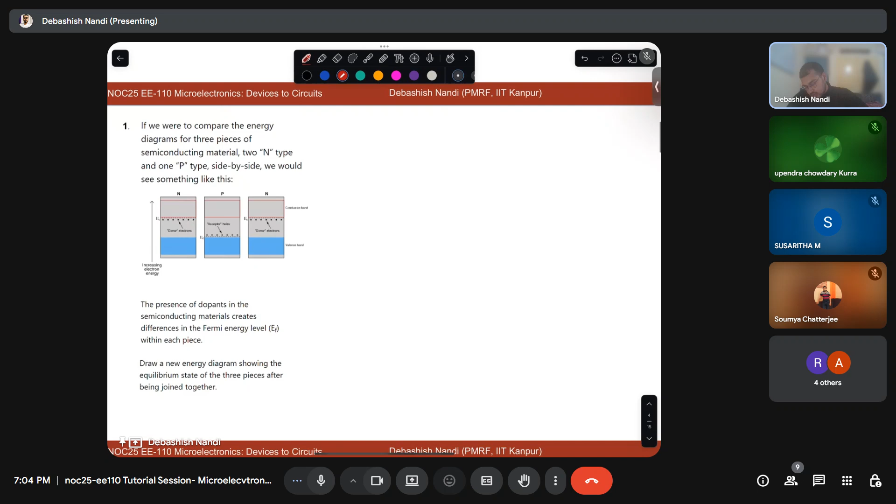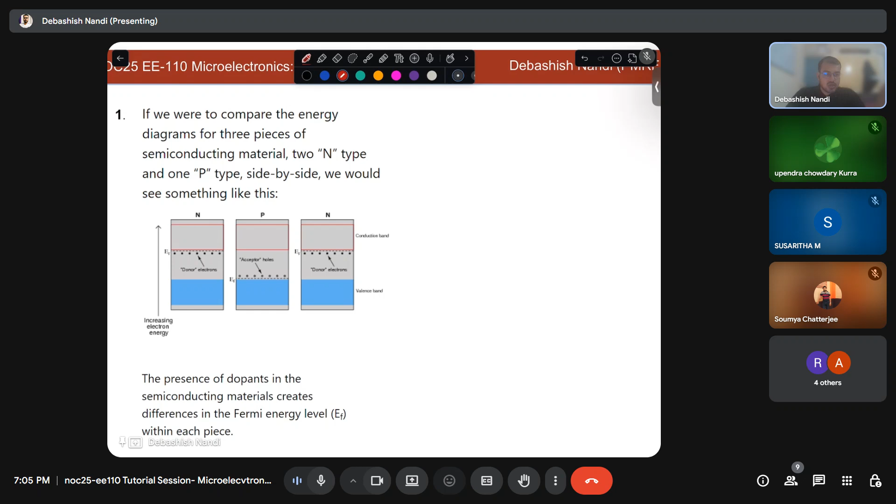So the question is that if we were to compare energy diagrams of three pieces of semiconducting materials, two are doped as N type and the middle one is doped as P type, how do you draw the band diagram? So how many of you are comfortable with the band diagram and how many of you cannot at all draw the band diagram or do not understand? Maybe you can respond in the chat. So are you all comfortable with the band diagram? I am talking about energy band diagrams.

Yes, sir, band diagram. Anything you say about band diagram will be good for me. There is some electrical noise coming from your microphone. Yeah, please go ahead. Hello, sir. Am I audible? You are audible. Please go ahead. Okay. Anyway, maybe some technical issue.

So anyway, I'll just handhold you for this part. I understand that most of you are from an undergraduate background, so there is a correct way to draw the band diagrams, right? So I'll be just going over that. What we are going to discuss is how to correctly draw the energy band diagrams. Okay, so a couple of pointers: the energy band diagram is a two-dimensional plot. Okay, it is a 2D plot.

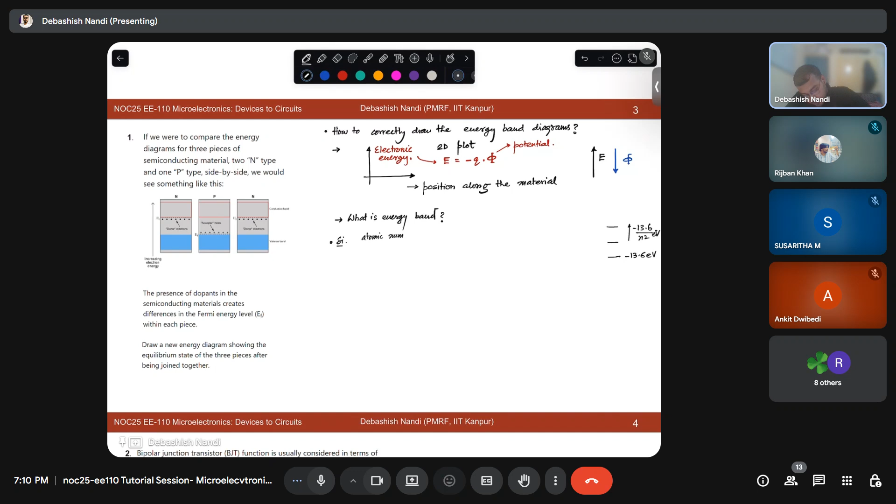You know, for hydrogen atoms you have discrete energy levels, right? Discrete energy levels starting with minus 13.6 electron volts, and it moves as minus 13.6 by n squared eV, right? n is your principal quantum number. Now for silicon, how many electrons does silicon have? What is the atomic number of silicon? Atomic number is 14, right?

1s2, 2s2, 2p6, then 3s2, 3p2, right? Is that okay? So now how many electrons do we have in our valence band? We have 4. That is the third orbital, right? So now if I consider a single silicon atom, I will have these discrete energy levels. Let's say this is your 1s, this is your 2s, very closely there will be 2p, then you will have 3s, and there you will have 3p, right?

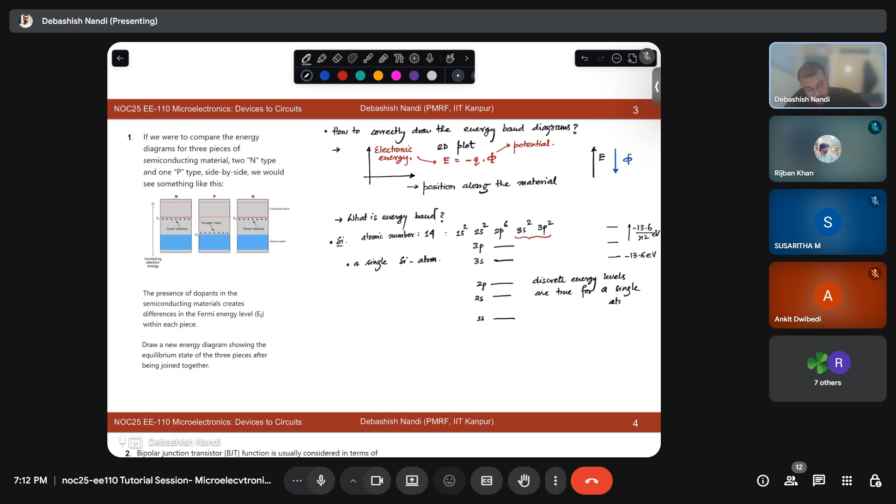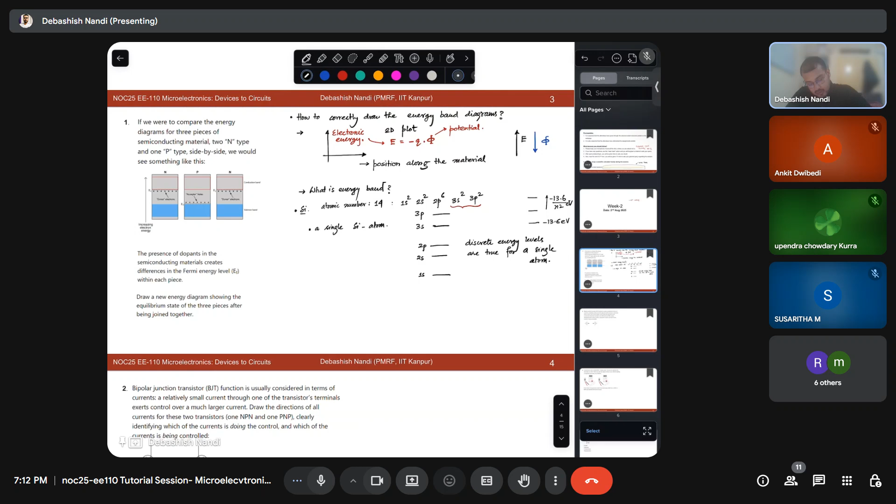Okay, so these discrete energy levels are true for a single atom, but when you move into a semiconductor material or a slab of semiconductor, there will be more than one atom for obvious reasons, right? Then what happens? Let's say these are two silicon atoms, and these two are apart by a distance, let's call it x. So if x is infinity, then we have discrete energy levels. Fine. Now what happens when we start to reduce x?

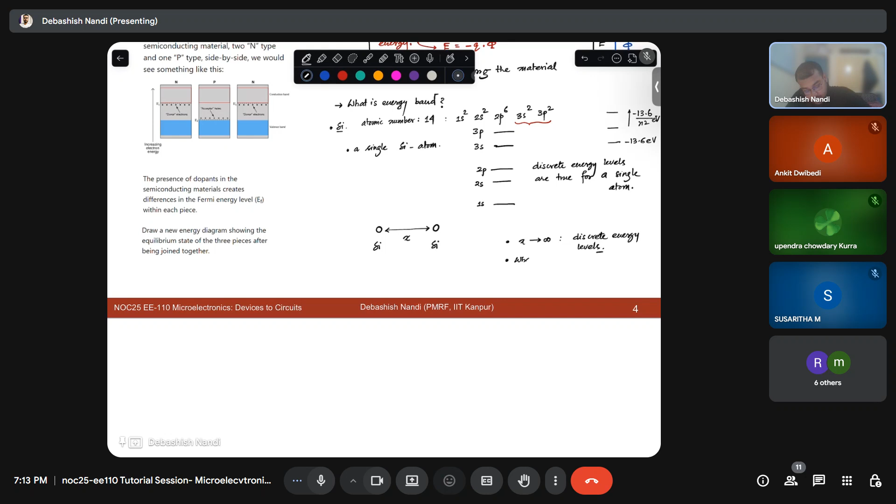If x is reduced, then you see this entire thing, so what I am doing, earlier it is very far, okay, now I am trying to bring this closer to the other atom. So what is happening? Will the lines superimpose exactly on top of each other, or will there be some gap? Can you comment, anyone? There will be a gap. There will be a little gap, right? And why is that so? Because

your Pauli's exclusion principle states that in a system no two electrons should have the same quantum numbers, right? That means no two electrons should have exactly the same energy. So they will try to cope with the same energy, but there will be a little gap. Now imagine how many atoms are there in 1 centimeter cube of silicon. Last time I told you, right? It is 5 times 10 raised to 22 per centimeter cube.

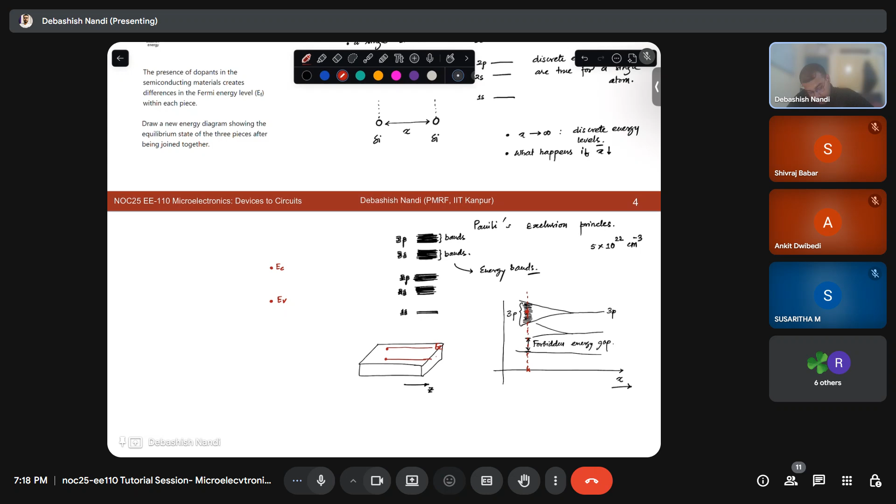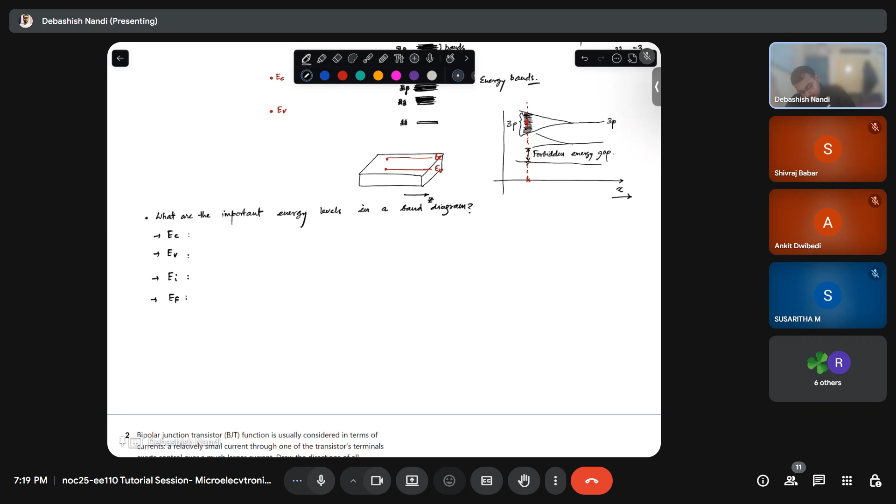If that is fine, then next point is, what are the important energy levels in a band diagram? So you know about EC, you know about EV. What is EC, what is EV? You know about EI, you know about EF, and there is something called E0. Once you understand what I am teaching you right now, you will be able to draw energy band diagrams for any material, believe me. This is the very fundamental stuff, okay?

So please tell me, what are these things? What is EC? Conduction band energy level. No, it is not conduction band energy level. You should be more specific. The bottommost part of the conduction band. Exactly. This is the bottom edge of the conduction band, okay? So why are we concerned about the bottommost point? Let's say this is my conduction band. Why am I concerned about only this edge? Can anyone tell me why this is EC and this part we generally do not concern about? Anyone?

The reason being that an electron, or for that matter any object in this universe, tries to attain the lowest energy level, okay? Even if you have an electron at this point that gains some energy, it will lose it and fall back to the conduction band edge via a mechanism called scattering. By scattering, the energy is lost or transferred in terms of heat, or lattice vibrations. So that is why we are concerned about the conduction band edge only, okay?

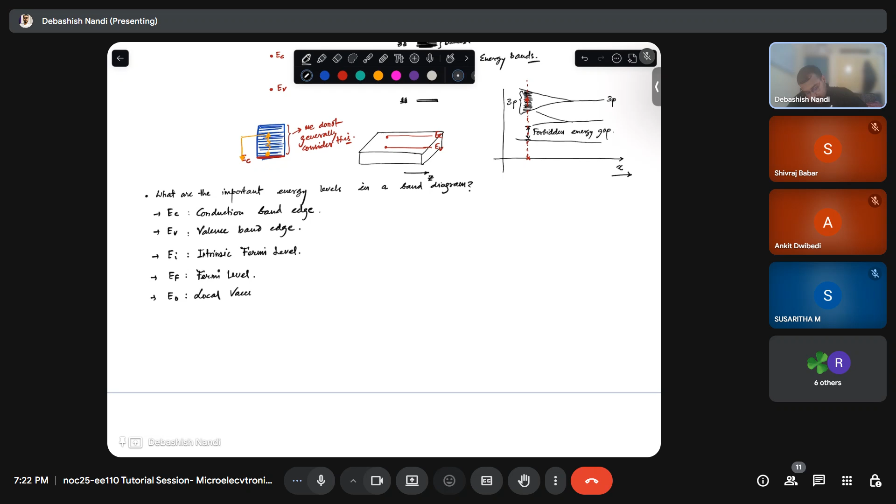So this is your conduction band edge. And what is EV? Similarly, this is your valence band edge. What is EI? EI is called the intrinsic Fermi level. EF is your Fermi level and E0 is your local vacuum energy level, okay?

Now let's say I have three materials as asked in the question. So this is your N-type silicon, this is your P-type silicon, and this is again N-type silicon, okay? And they are not joined. What does not joined mean? They are not put together, that means these are individual systems. So this is your system 1, system 2, and system 3. Fine. Now let us try to draw the band diagram for each of these.

So I am drawing this line as E0. Remember one thing, when the materials are not joined, your vacuum level or local vacuum energy level should be constant, okay? Because that has nothing to do with the materials. It is in vacuum, just above the material. So next, let us draw EC. Then we will draw EV. So this is your EC, this is your EV, and let us draw EI.

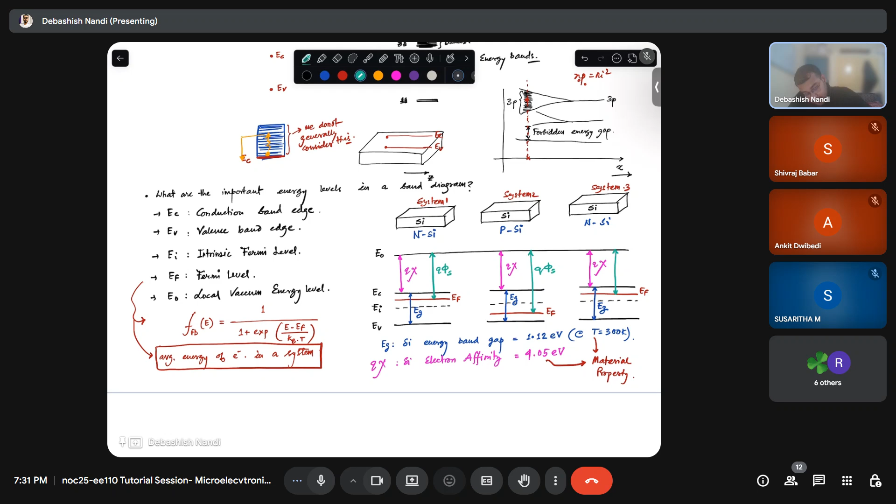What is this energy? This is called Q phi S. Anyone? So without knowing these things, if you are drawing the band diagrams, that means you are doing something wrong. Okay. So Q phi S is the work function. That is the energy difference between the vacuum level and your Fermi level.

Okay. So now tell me, is this a material property or will it change with doping? Yes, it can change with doping. So this is what we call an induced property. Okay.

So these three vertical dimensions of energy you should be aware of. One is electron affinity, that is a material property. Another one is your band gap, that is a material property. Material property means the base material on which you are doing the doping, the base semiconductor. But the work function depends on doping. So that is an induced property. Okay.

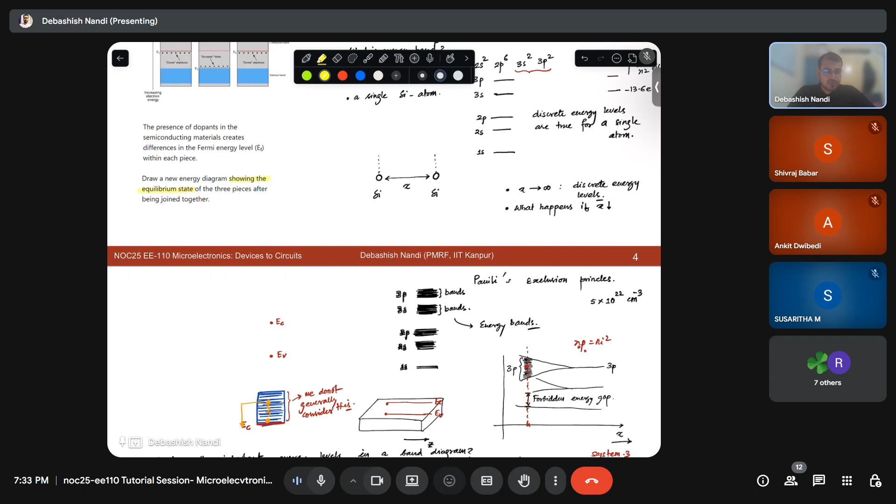So now in the question it is asked that we need to draw the equilibrium band diagram. So what is equilibrium? Can we have a discussion on equilibrium? Any one of you want to volunteer? Having the same work function. Having same work function? No. We will come to that, that is not the case.

So if I tell you what is equilibrium, the question remains incomplete. Okay, so this concept comes from thermodynamics. And what does thermodynamics talk about? What kind of energy does thermodynamics talk about? Thermal energy, right? Thermal energy, yes, sir. So equilibrium is actually your thermal equilibrium.

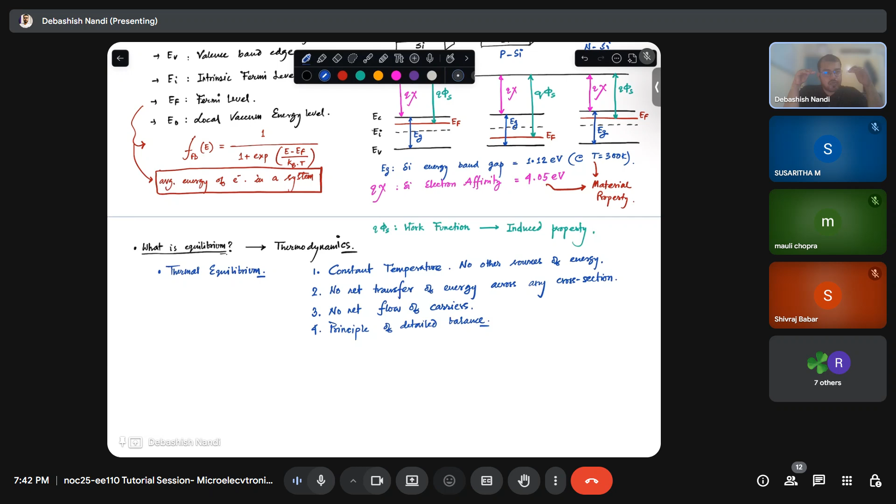Okay. Now tell me one thing, if EF or the Fermi energy level in a system conveys the idea about average energy of electrons in a system, what should it be in equilibrium with respect to position in that system? So the question is, let's take any system. I want to draw the Fermi energy level. Can I draw it like this? EF at equilibrium.

What will happen if the energy is like this? This point is at higher average energy. EF is what? Average electron energy in the system. So this point is at lower energy, right? If you have some energy gradient, then there will be flow of carriers. But that is not possible. If I take my cross section at this point, I will always see a flow of energy in this direction, right? So that is not allowed.

So how should my EF look in case of equilibrium? Anyone? Guys, please try to interact.

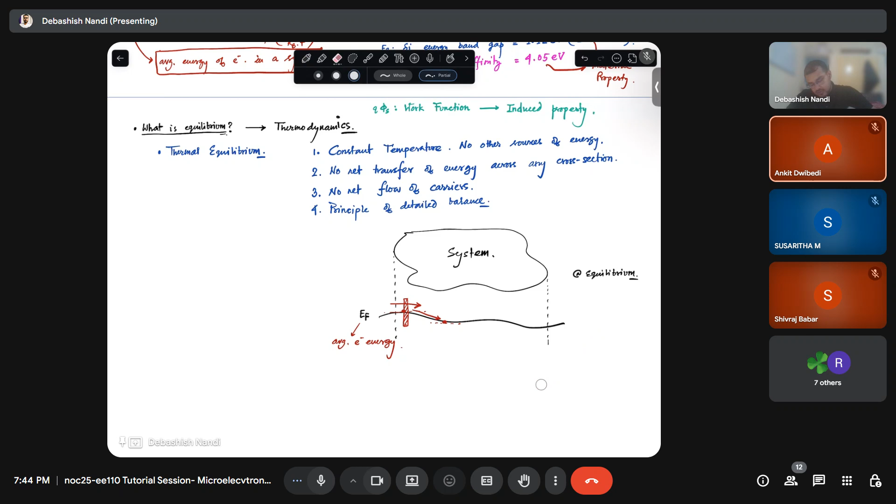A straight line. A straight line can be this also, right? A straight line with no slope, basically. That means a constant line. Constant line, yes. So at equilibrium, your EF has to be constant by the definition of equilibrium, okay? So dEF/dx, let's say this is your X direction, should be equal to 0 for a system. Fine.

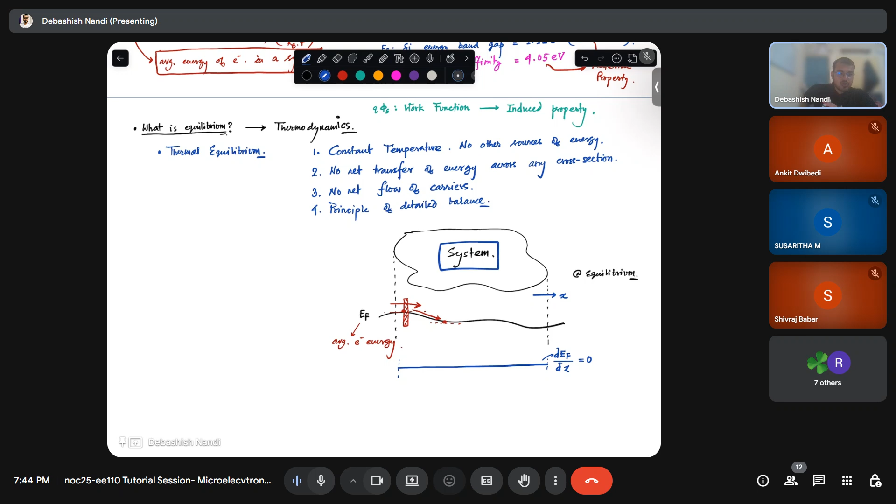If we are good till this far, let us proceed with the band diagram of the entire system. So earlier we had these three blocks. This is n-type silicon, p-type silicon, n-type silicon, right? And what were the bands? This was my E0, then somewhere here I had my EC, somewhere here my EV, this is EC, this is EV, and these were my Fermi levels, right?

So the catch is that this was system 1, system 2, and this is my system 3. Now what is asked is that I need to make them a single system. Fine. So these were my EFs. So now I need to make them a single system. Let's say this is my N, this is my P, this is my N. So in the end the system is in equilibrium. So what is the first thing that should happen in this case? What is the first line I should draw?

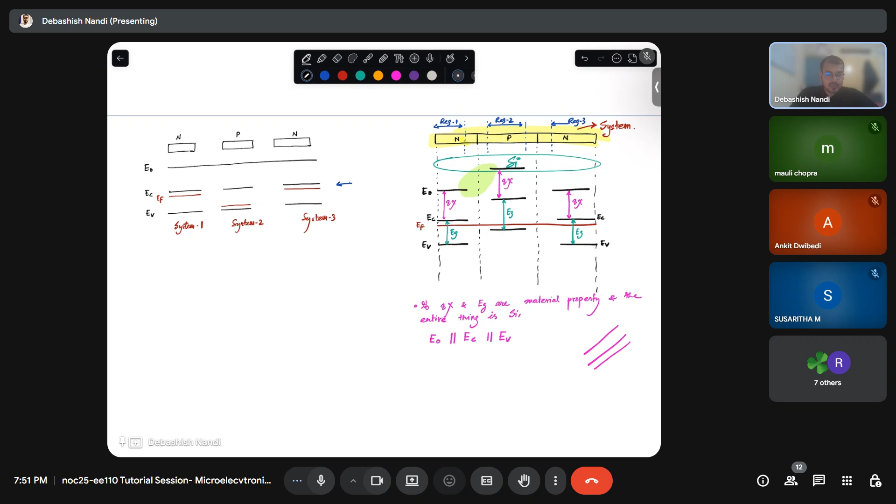By the way, one important point: if q chi and Eg are material properties and the entire thing is silicon, can I say that my E0 is parallel to EC, which is parallel to EV? Whatever the line may be, if my E0 is like this, EC will be like this, EV will be like this. Can I say that? Anyone? Come on, I need an answer. Can I say that these three lines will be parallel if we have the same material?

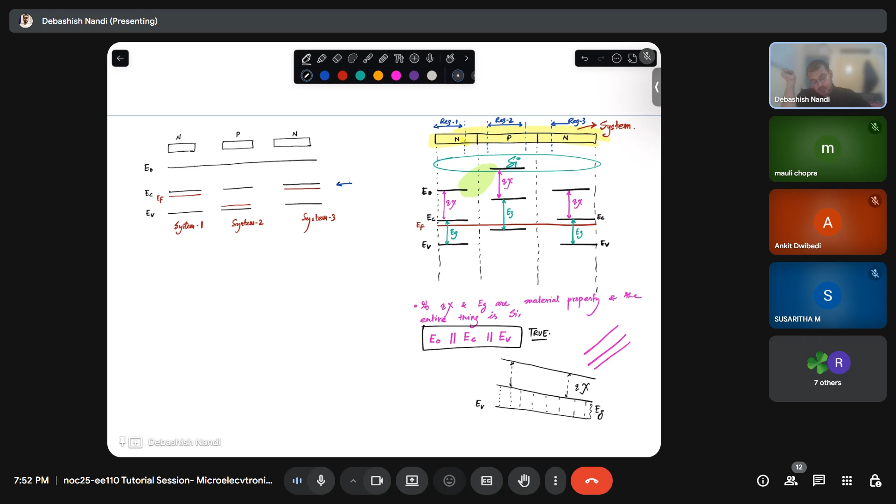Let's say my valence band is this. At each location, my conduction band should also be like this, because at each point the distance between these two is Eg. Similarly, between the conduction band and E0, if the material is the same, at each point it has to be q chi. So this statement is true. Is it okay? Yes, sir. So I need to track only E0, and I can just draw EC and EV parallel to that.

So now at this green junction, I need to join these two black lines. This is my E0 for, let's say, the n-type, and this is p-type, also E0. So how should I join? Can I join like this? No, sir. Why? Because we are changing the distance between two silicons, and I think by adjusting the distance between two silicon atoms, that is one solution.

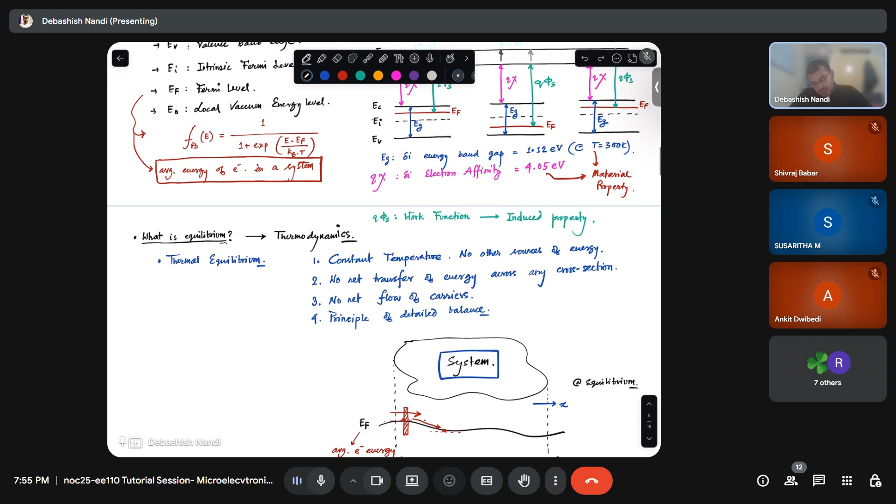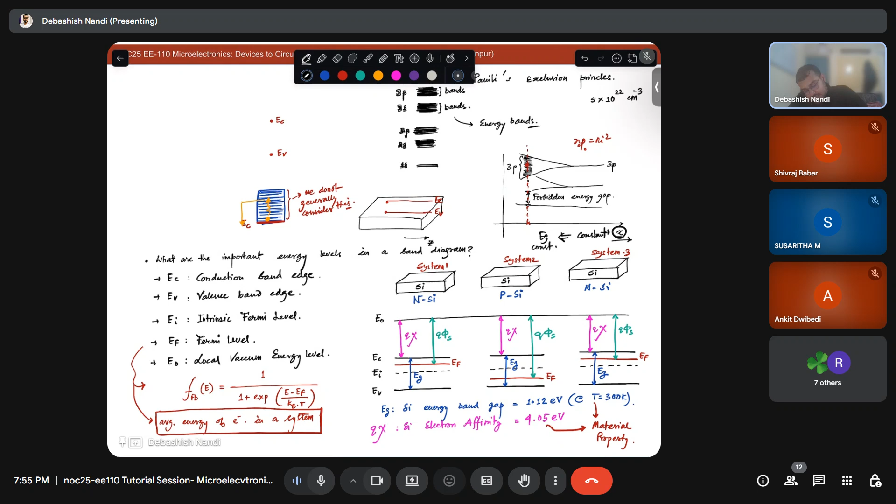So where do you see that your silicon atom distances are changing? Silicon is in the background. Silicon will have the same atomic distance, 5.43 angstrom or 5.43 times 10 to the minus 10 meter, between two atoms. That has nothing to do with this. It will always be the same, because that is what determines your band gap. So your Eg is constant throughout the material, and this chi will always be constant for a material. Yes, sir.

So why can't I join it like this? What does this black line signify? Which energy level? Sir, it's the local vacuum energy level. It is the local vacuum energy level, right? I have mentioned that electronic energy is equal to minus q times the potential. Yes, sir.

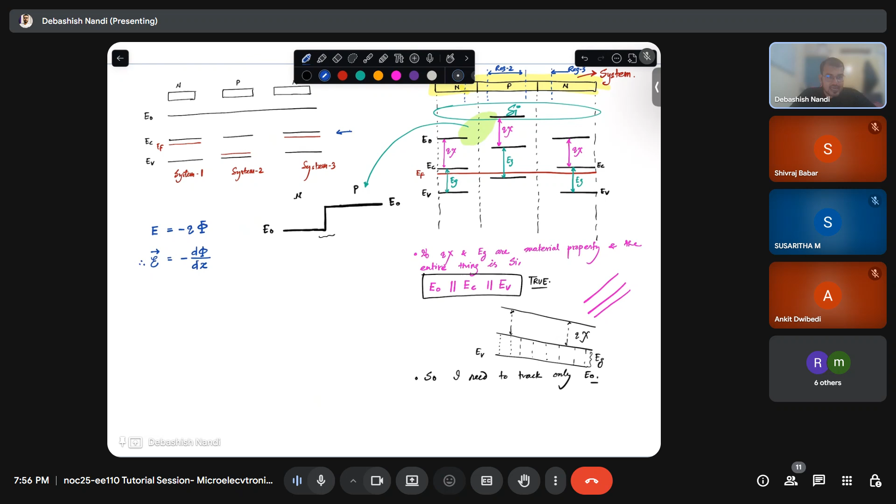And what is electric field? Electric field is the negative derivative of the potential. You are okay with that? Yes, sir. So what will the electric field be in terms of electronic energy? Can I write this? This is nothing but, in 3 dimensions, the gradient of your energy. Now tell me, if you have done signals and systems, what does this function look like?

Unit step. Exactly, it looks like a step function. So what is the derivative of a step function? Impulse, or the Dirac delta function. What is the magnitude of the impulse function? Infinite. That means at this point, the electric field is infinite. Is that possible? No. That tells me immediately that I cannot join two bands of the same material like this. I need a smoother transition. Now, if I have a smoother transition of E0, can the electric field be infinite anywhere?

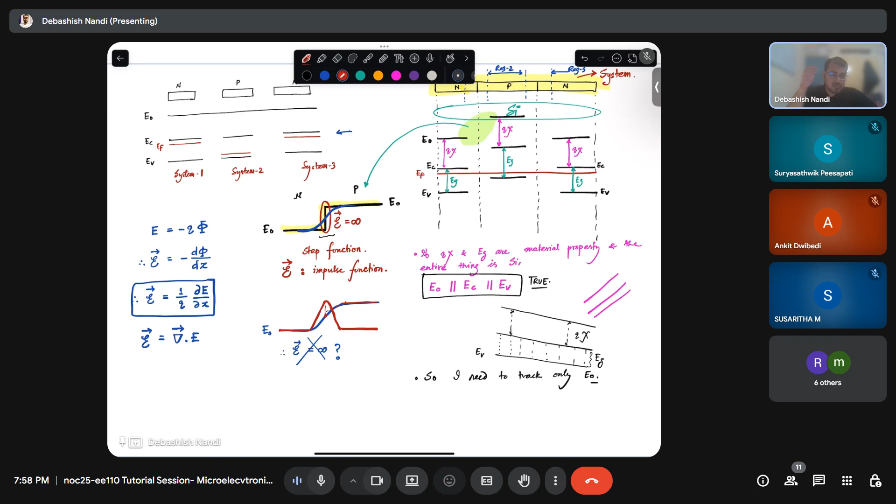In this case, electric field cannot be infinite, right? Obviously I can see that if I draw the electric field, this is constant, so it will be 0, and then the slope is increasing, right? At this point the slope is maximum, and then again the slope is decreasing, and this will be constant, so this will be my electric field profile. So it is not infinite, right? So that means the way I will join my band diagram is like this.

Is that okay? Yes, sir. But what is the catch? That at each point, this value is q times chi. At each point, this value is Eg. Because this is a material property, it will never change. For a same material, it will be always same. Fine. Okay.

If that is okay with you, so this is how the band diagram of an NPN transistor at equilibrium looks like. So now will you be able to draw it for PN junction and other transistors, for example PNP? Please follow the steps and draw it with some logical reasoning for why it should be.

Again, this is something called qualitative energy band diagram, not quantitative. For quantification, you need to tell me what is the distance around which the band will bend. That can be easily found, but that is something advanced for you. Okay, so we call it qualitative energy band diagram. Okay.

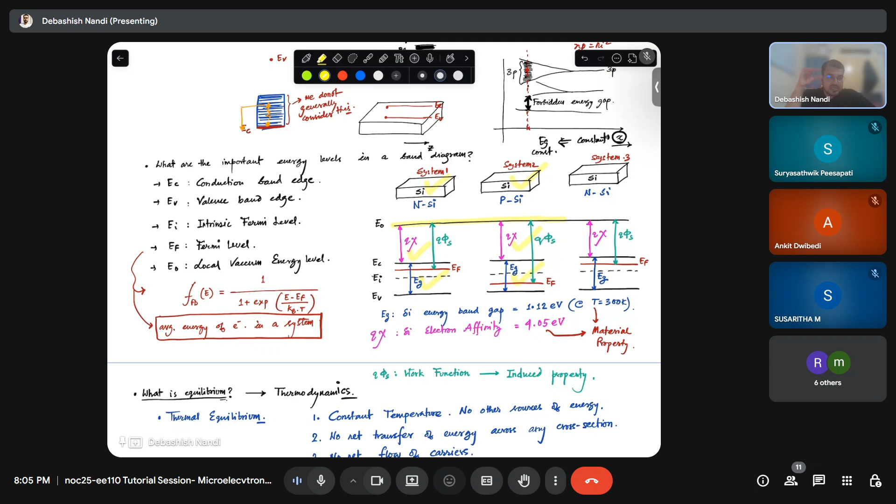Then when both of them are combined, the entire stuff makes a system. Then you come back and draw the constant energy level and again check what are the vertical dimensions, and then draw the bands accordingly.

And E0 you make it continuous because at vacuum there cannot be infinite electric field, right? From the definition of electric field, this we have seen. So if that is fine with you, then you start drawing the EC and EV following the Q chi and EG convention,

and then see that at the junctions where silicon finishes, in the region where the material is silicon your Q chi will be same, but as soon as you go to germanium, your Q chi changes and your E0 will always follow the EC in that material. So you can see that there is a sudden jump or discontinuity at EC. That is completely fine, because you are changing the materials. But E0 is irrespective of materials because it is at vacuum, so it cannot have any discontinuity.

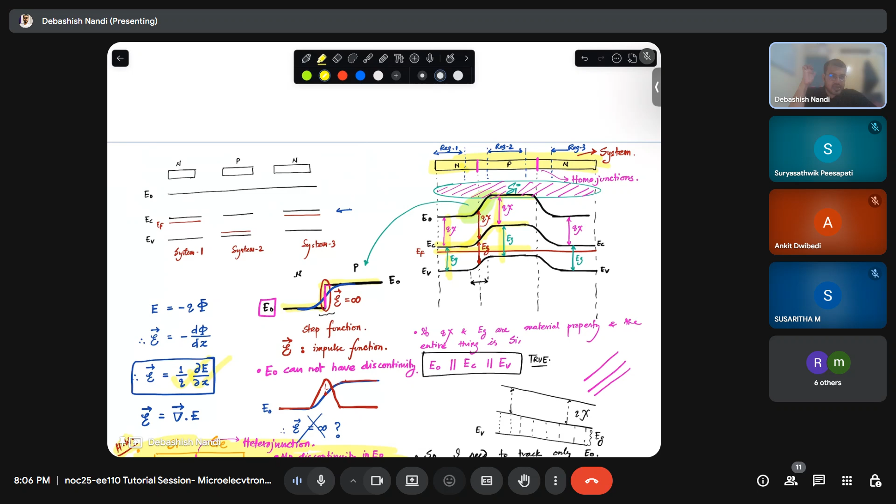Okay, so try to draw this. I think this will cover the band diagram aspect of your PN junctions as well. If you want to understand the band diagrams in your textbooks, now once you have understood this part, you can just go and check that everything is falling in place. So let us move on to the next question.

So it is asked that bipolar junction transistor functions are usually considered in terms of currents. This we have seen in the last class. A relatively small current through one of the transistor's terminals exerts control over a much larger current. Draw the directions of all the currents of these two transistors, clearly identifying which is the control and which is the controlled. Okay, so can you voluntarily comment?

So this is your, let's say, PNP transistor. This is your emitter, so this will be P plus plus, this is N plus, this is P minus. We will see what is this. So this is your WE or the emitter width, this is your base width, and this is your collector width.

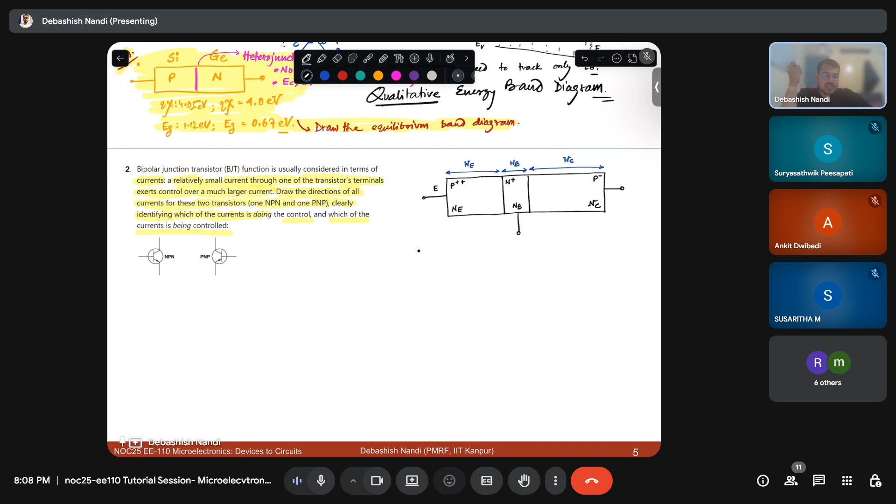And the doping is, let's say this is Ne, this is Nb, this is Nc. You can ask why I did not write Pe, because it is P type, but the general convention is to write the doping with N as a capital letter, and then you can change the subscripts. So now can you tell me the relation of these things, the doping and this?

What I mean to say, let us first consider the width of the regions. Which has the highest width and which has the lowest width in the BJT? Collector has the highest and base has the lowest. So that means your WB is less than WE is less than WC. That is what you have told, right? Yes, sir. Okay. So that is correct.

So the key aspect is that your base width determines the transistor action. We will see how. And your collector width is increased because, why is collector width largest? To tackle the power dissipation and to get more number of electrons.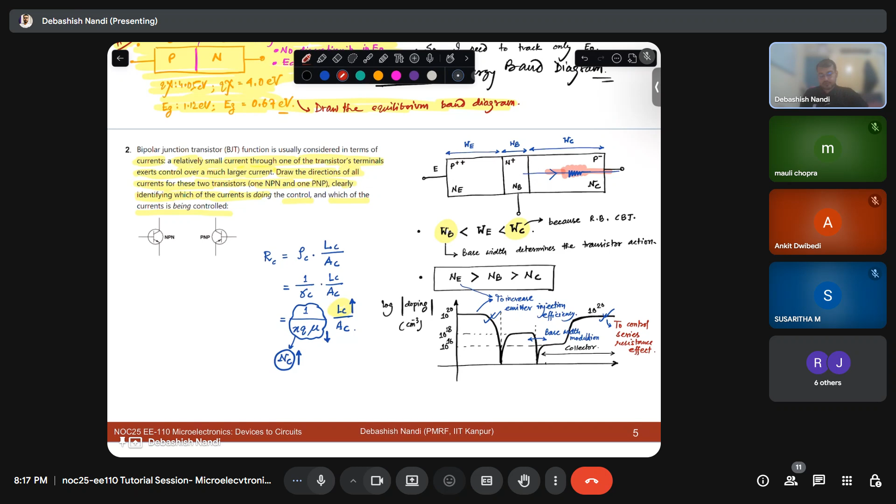So that is why you dope it higher, so that this term is reduced and the overall resistance can be controlled. This is to control your series resistance effect. You must have seen this term in the high forward bias scenario in your PN junctions. So this is how the doping and dimensions of the BJT look.

Now, how does the current flow? Let's say I am taking two scenarios, PNP, and then I will just change this to NPN. So what will happen? First, at equilibrium, there will be formation of a depletion region. If nothing is connected, there will be a depletion region. Similarly, in case of NPN, there will be a depletion region.

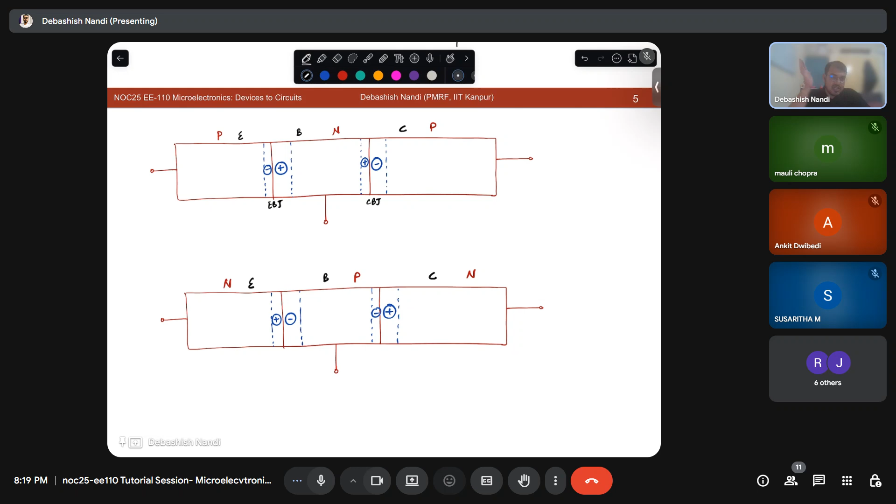And the depletion region in a PN junction is more on which side, lowly doped or highly doped? Lowly doped side. So this is your emitter, base, collector. Your emitter is highly doped, so at your EBJ the depletion region will be more at the base side. Similarly, at the base-collector junction, it will be more at the collector side. So at equilibrium, you can see that from the band diagram.

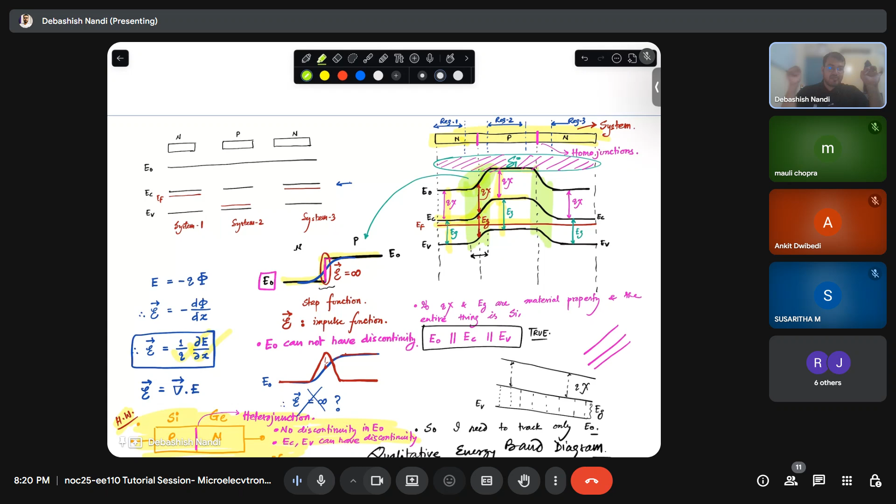This is the depletion region where the band bends, and wherever the band is constant, there is no space charge, no charge. You can directly derive it from Gauss's law. So now this is in equilibrium. What is the most common mode of operation? We forward bias the EBJ, right? So let us forward bias the EBJ.

So this junction is forward biased. What will happen? First, holes will be injected. Similarly, electrons will be injected. Let me just use different colors. So holes will be injected. In this case, electrons will be injected. In this case, holes will be injected this way, and in this case electrons will be injected this way.

So what will happen in forward bias? These holes will cross this barrier and your depletion region will shrink, right? And these holes will recombine here. Similarly, electrons will be injected towards the emitter from the base side, and again they will recombine. The same thing will happen this way as well.

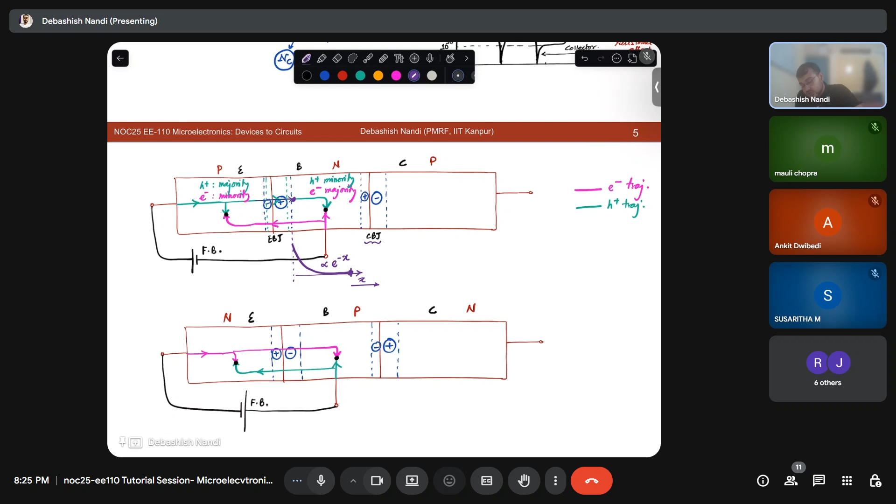So now what I have to do? I have to bring this junction leftwards. That means I need to make my WB smaller, so that before this entire thing is recombining and getting vanished, some of the holes cross the collector base junction as well. Fine.

And how should I bias my collector base junction? So this is P type, this is N type. To attract holes, whatever holes are passing this way, what should I have at this terminal? Positive voltage or negative voltage? Negative. So that is why this junction is reverse biased, so that your holes can get collected at the collector end. Okay.

Now if I track the currents, there is this current. What is flowing at this junction? Only holes are flowing. So this is my IE or emitter current. Similarly, at the base terminal, only electrons are flowing, so current should flow opposite to the electron, in this direction. That is your IB. Similarly, at this junction, holes are flowing. So this is my IC. Okay.

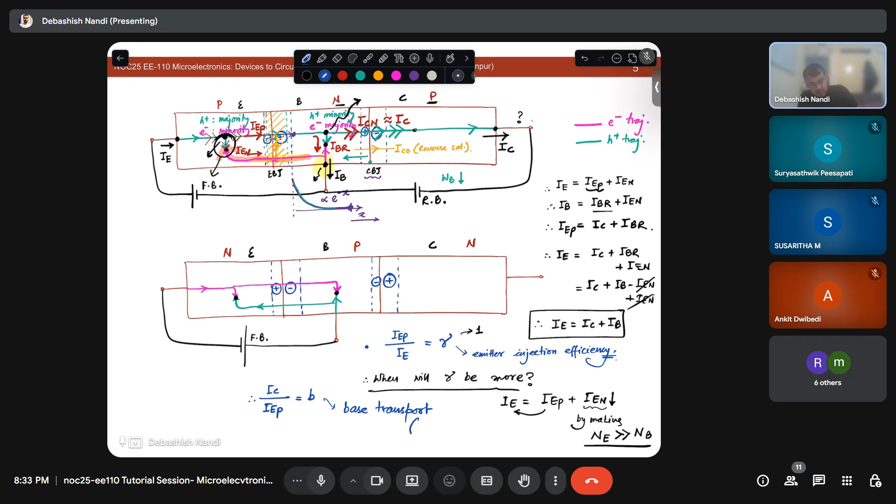Another term is your IC by IEP, which is called B. This is called base transport factor. So why is it called base transport factor? Basically, whenever your holes are transporting...

Hello. Yeah. Hello. Yes, please go on. Please go on.

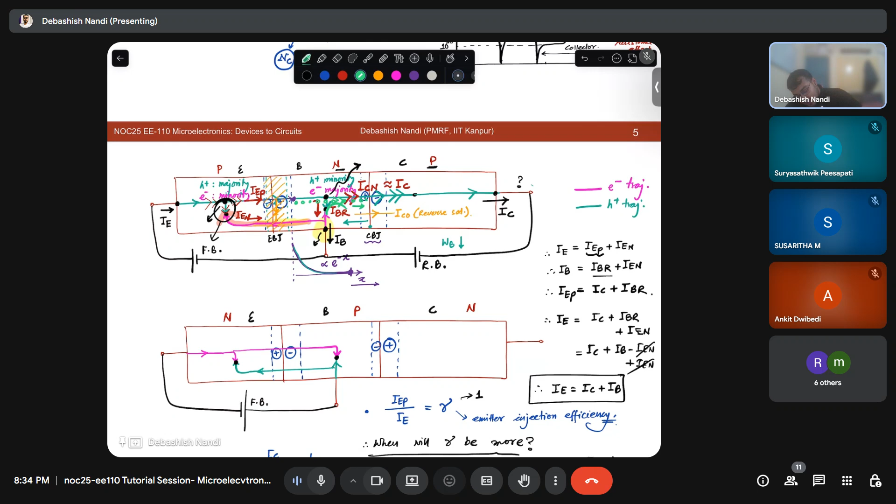So whenever your holes are transporting through the base, how much current is dropped, that measure is given by this base transport factor. Basically it is this quantity that is getting dropped, right? So now if you multiply these two, what do you get? You get your IC by IE, that is your alpha. Similarly your IC by IB is called beta, and from the relation IC plus IB equal to IE, you can find that alpha is equal to beta over beta plus 1. So these are the current gains in the transistor.

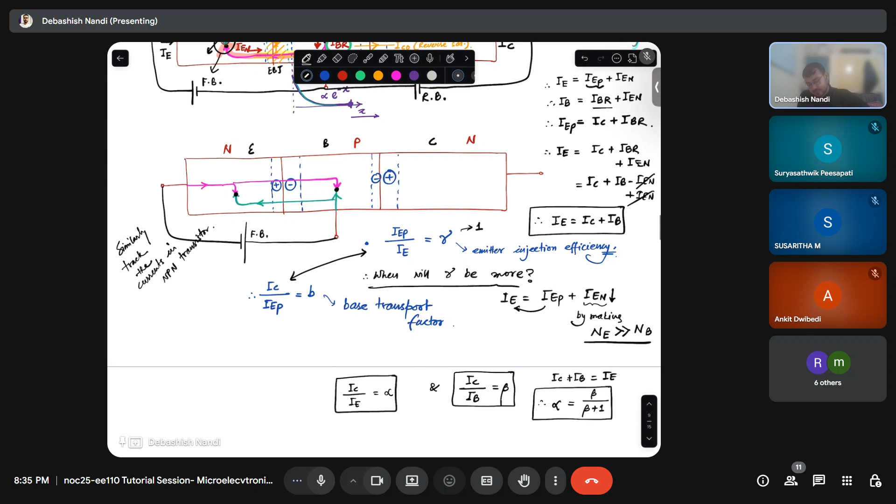You can similarly track the currents in an NPN transistor. Just follow the same nomenclature and make sure you note the direction of current flow is opposite to the electrons and towards the direction of the flow of holes. So now the question is, what kind of configuration is this? Emitter is at the lower side, so we can safely assume that this is a common emitter kind of configuration, right?

So what will be my currents? In case of PNP, current is flowing inward to the emitter. This is IE, going outward at the base, this is IB, and going outward at the collector, this is IC. This will be just the opposite for the NPN transistor. Now can you tell me which is the controlling current and which is the controlled current? What current am I trying to control? IC. So IC is the controlled current. And what is the controlling current? IB. Why not IE? In this configuration, IB is the controlling current, right?

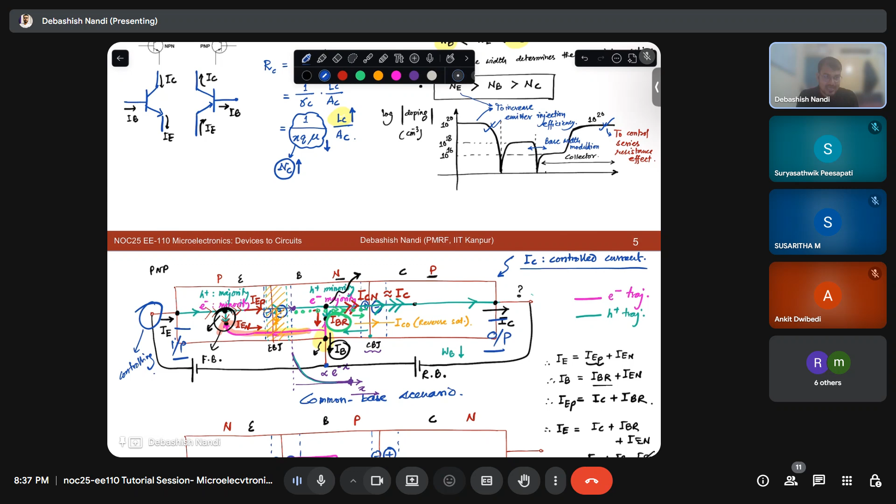Because this is a common base scenario. This is your input port, this is your output port, and the base is common here. So your controlling current is IE, not IB. Similarly, in this case, this becomes your input port and this becomes your output port, so IB is controlling. And similarly, this is your output, this is your input, so IB is controlling. But in the common base scenario, the full-blown diagram I have drawn, the emitter current is the controlling current. I think that answers the question.

So how many of you have gone to the electronic circuits lab, or at least have seen a digital multimeter, the yellow or orange one? I have seen it, sir. So did you notice something called the diode check option? Yes, sir. Why do we use the diode check option? Sir, because we have to... Because you have to do what? It is used to identify the P terminal and the N terminal of any kind of junction. Yes, sir. That is the diode check option.

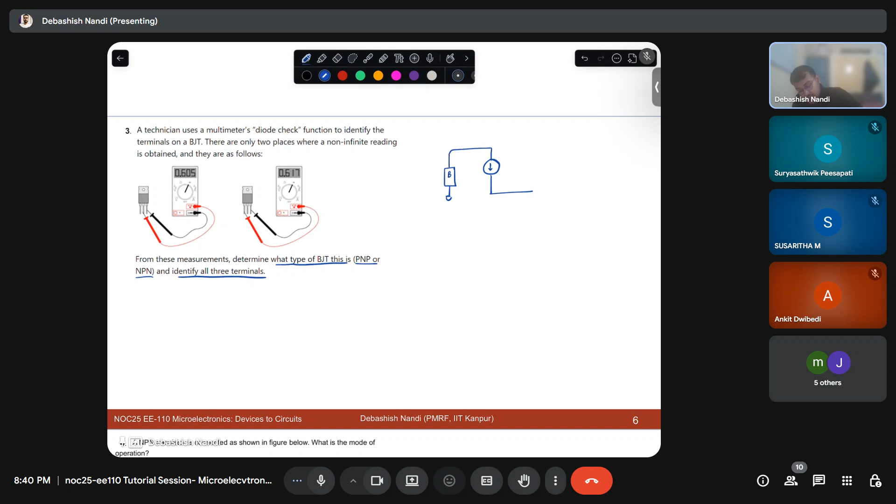So basically you have a battery and then you have a current source, and this is where you connect the junction, and this is the voltmeter. By the way, what is the series resistance of a voltmeter? You studied it in 11th, I guess. What is the series resistance of a voltmeter?

Should it be infinity or should it be 0? What is the ideal series resistance for an ideal voltage source? Last class I have discussed. Ideal voltage source should be very low. 0, right? Zero. Ideal means 0. But in case of voltmeter, what is the ideal series resistance? Infinite. Exactly. So basically there you have a series resistance that is infinity. So it is just used to measure the voltage across any device.

Fine. So if you are aware of the diode characteristics, let's say this is a diode, please note the directions. If this is your VD and this is your ID, and if I plot ID versus VD, my diode characteristics look something like this. Are you familiar with this? Yes, sir. Okay, so now let me say that I am connecting this diode in this fashion. I do not know which side is P, which side is N, but just for the symbology I am using it in this way.

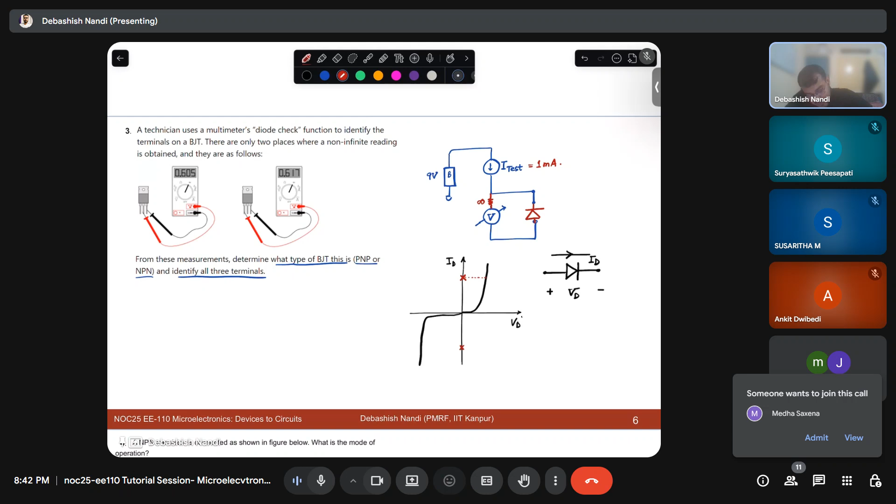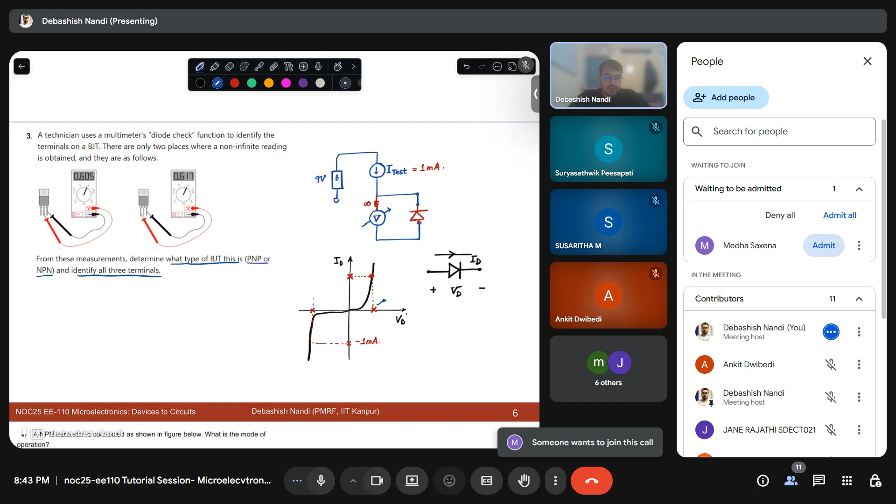And I am injecting 1 milliampere of current. So this is the 1 milliampere of current, and this is minus 1 milliampere of current. Okay. So what if it is a silicon diode? What will be this voltage? What is this voltage for a silicon diode? So what is the diode relation? Diode relation is Is times exponential Vd by eta Vt minus 1, right?

So after your 0.6 or 0.7 volt, you will have a huge exponential rise in the current, right? That means you can approximate it like that. Beyond this current level, however much you increase, your voltage does not increase much, because it is then the logarithm function of the current. Logarithm function is a very slow function. Anti-exponential is your logarithm. So this generally ranges at 0.5 to 0.7 volt. So if this reading shows 0.5 to 0.7 volt, I can safely say that the diode is connected in forward bias. Okay.

Now what if the diode is reverse biased? 1 milliampere is a huge current for a solid state PN junction silicon diode. So if I am injecting 1 milliampere, then it should show the Zener voltage or the knee voltage. If it is an avalanche diode, it should show the avalanche knee voltage, right? And this voltage is typically around 1 volt for your 1N4001 kind of diode. So if it is showing a magnitude of 1 volt, or ideally minus 1 volt, you can safely say it is in reverse bias.

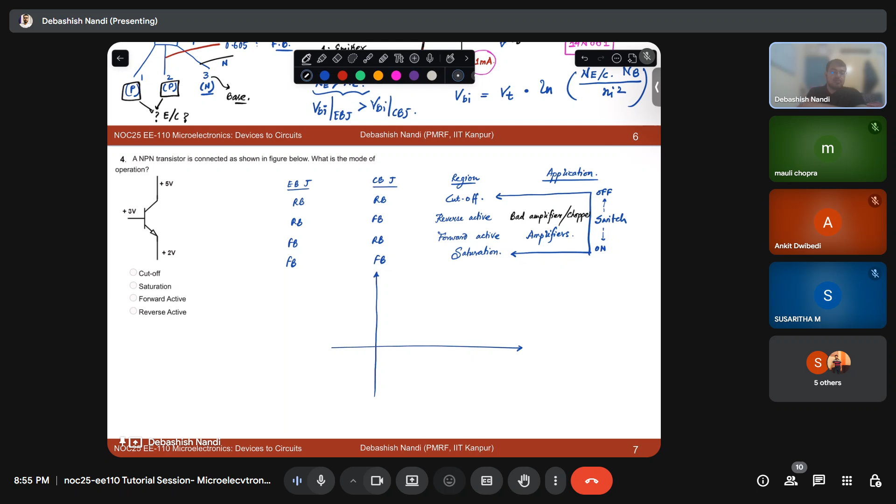Anyone? Bad amplifier or chopper circuits. Okay, when you want to chop off some of the portion of any waveform. So why is it a bad amplifier? For amplification we have seen that my emitter doping has to be higher, this has to be lower, and this region length has to be higher.

It is everything in the opposite direction, right? As if you are applying these biasing conditions just opposite. So as it is NPN, obviously it will have the same transistor action, but the amplification will be very bad. You may even get some kind of attenuation as well. Attenuation means an amplifier with a gain less than 1.

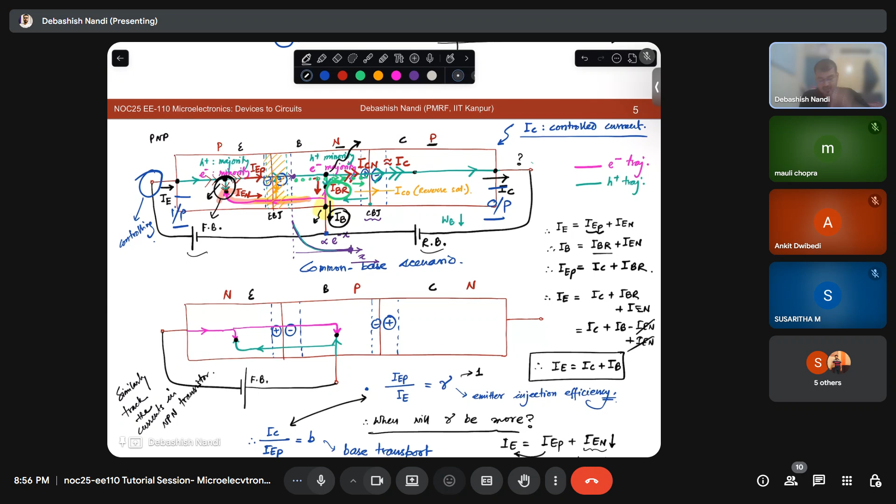So how do you draw the characteristics? So this will be, let's say, something like this. Let's say this is your IC, common emitter I am considering, and this is your VCE. If it is a common emitter, I can simply put the reference potential at ground, provide input here and take output here. So this is my IC. Basically I am just changing VC, because VCE is VC minus VE. It will be easier for you to understand.

Fine. So let me just compartmentalize the entire thing. So this is one region, this is another region, this is another region, and this is another region. Let's say this is my VBE1, around 0.7 volt, then VBE2, VBE3 which is greater, and VBE4. So basically VBE is increasing this way, VCE is increasing this way.

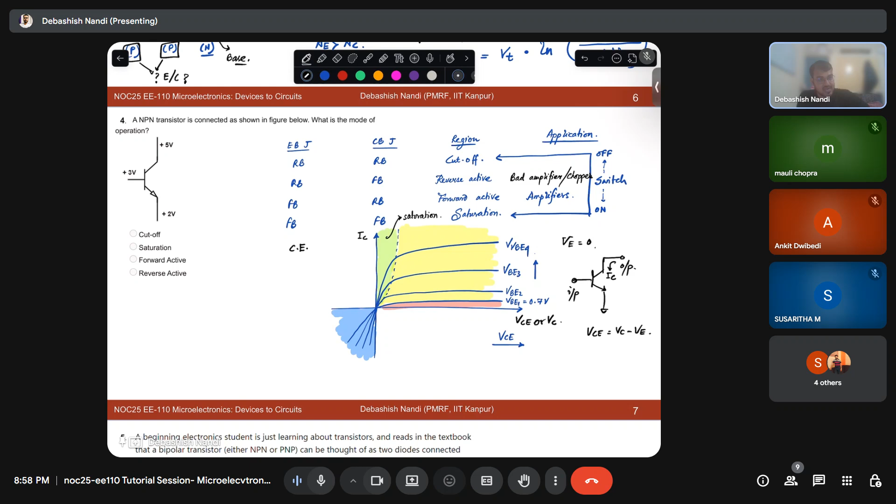So now can you tell me what is the green region? Saturation. And what is the condition for saturation? Do we meet it? The saturation condition is both have to be forward biased, right? So if I am above this dotted line, my VBE is greater than 0.7 volt. That means EBJ is forward biased. And what about CBJ, the collector base junction, or VCB?

VCB is equal to VC minus VB. VC is my N terminal, VB is my P terminal. So to make this forward biased, I need a lower value of VC than VB; only then will my CBJ be forward biased. As I am at lower VC, this junction gets forward biased. As soon as my VC crosses this line, where VC is greater than VB, my CBJ is reverse biased, and since I am above this line, my EBJ is forward biased.

So this is your forward active, this is your saturation, and at this location, where am I? I am already beyond this line, so my CBJ is reverse biased, and with VBE less than 0.7 my EBJ is reverse biased. So this is my cutoff region. In this case, I am left of this exponential dotted line, so my CBJ is forward biased, and I am below this horizontal dashed line, so my EBJ is reverse biased. This mode is reverse active. So this is the output characteristics plot.

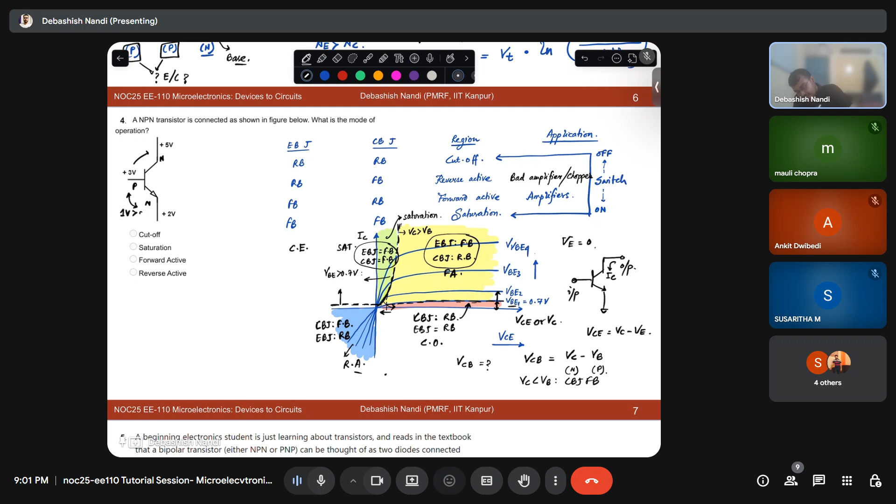So here I can see this is an NPN transistor. This emitter base junction is at 1 volt, greater than 0.7, so it is significantly forward biased. EBJ is forward biased, and my CBJ, N and P, N side is higher than P side, so it is reverse biased. So I am in the forward active mode. Is that clear?

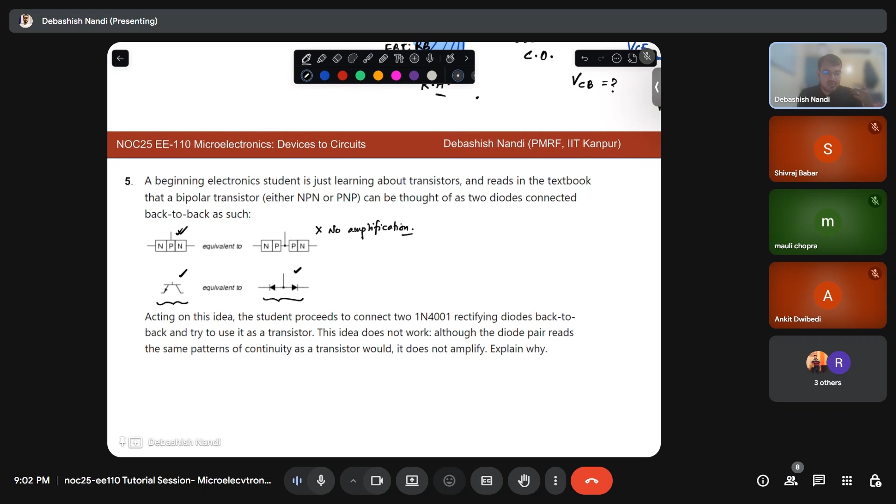I want you to think about why this equivalent circuit cannot provide you the amplification, so that in the next class we can directly start the discussion on that. The answer lies in this diagram. Whatever we have discussed today, see the differences between the two architectures, and then come up with some answer.

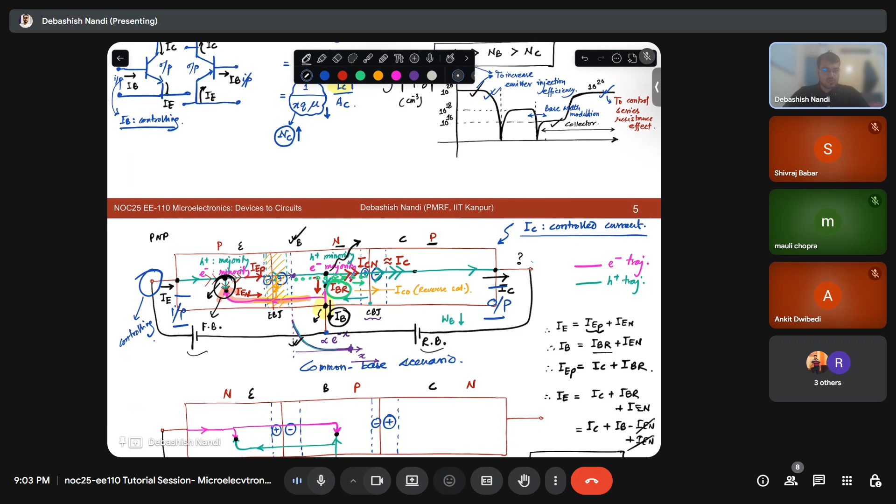Sir, I want to know how we achieve the different concentrations of doping within the collector, technology-wise. Technology-wise, okay, that is a very good question actually. We draw the transistor like this, but it is never like this. So what happens? Let's say you have a base silicon. Let's call it N type. You start with some N type.

You create a mask through which you apply your diffusion, and you make a portion of it p type, and then a process called photolithography. You are aware of photolithography? Yes, sir. You create some boxes and select some particular region where you put some light and do the chemical etching. This is how you can do selective doping.

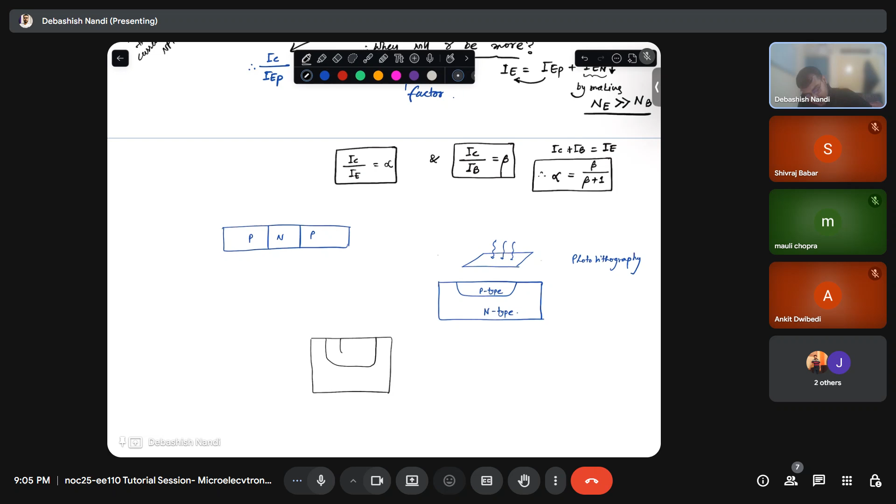So that can be done in a vertical fashion. Is that all right, or should I explain more? No, sir. Okay, so then you have this p-type well, and then again you make some n-type well. So this is your n-type, sorry, this is your p-type. Let's say your base material was n-type. I am just showing you some portion, not all.

You dope it n-type, n plus type, and then again you dope this portion p-type. So now what do you have? You put a contact here, this becomes your emitter. You put a contact here, this becomes your base. You put a contact here, this becomes your collector. This is how the actual BJT structure looks. BJT is a vertical device.

But to analyze, we just focus on this red part and flip it over. If I bring out this red part, I have p plus plus, n plus, then p, and I assume my contact is here. What is the difference? You will have a base resistance, which we call RBB. In small signal modeling of BJT, this base resistance is a menace to get rid of. And we assume the collector contact is at the bottom, because the collector contact will also see some resistance.